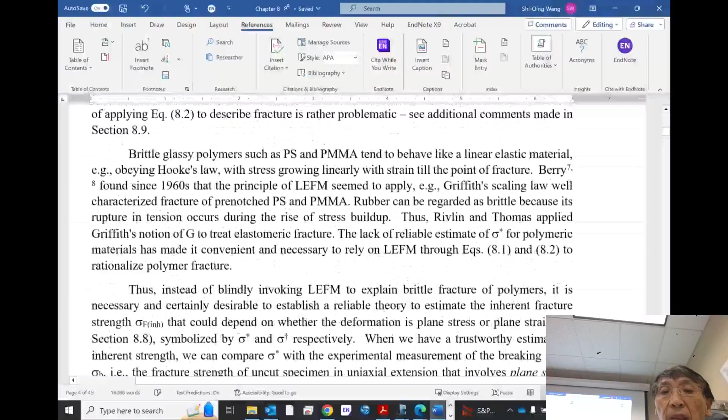So what I want to indicate is I'm not going to go through everything, but basically it's based on chapter 8 of my book. And there's an outline, meaning table of content. I will follow some part of it and skip some part of it.

Meanwhile, it just so happened that this perspective article is about to be published, which is describing a new outlook at the subject of fracture mechanics with regard to polymers. So it's very, very fresh in terms of what we need to say.

So let's get started. So this is going to be, if you like, fracture behavior of polymers. So instead of saying fracture mechanics, that's kind of scary, right? You just say fracture of polymers. And we will talk about both plastics and elastomers.

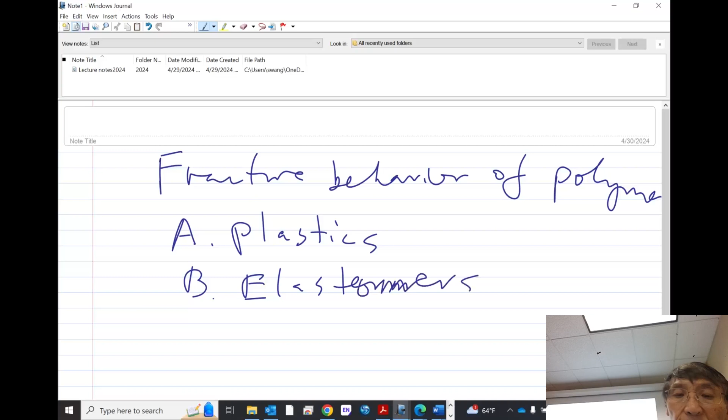So let's begin with what is fracture mechanics. It becomes a business when we worry about fracture, of course. But it really is where we need to talk about it when you are given a piece of material and you stretch it and you measure a point where it breaks. It's called sigma B. In our notation, we call this nominal strength, something you can measure.

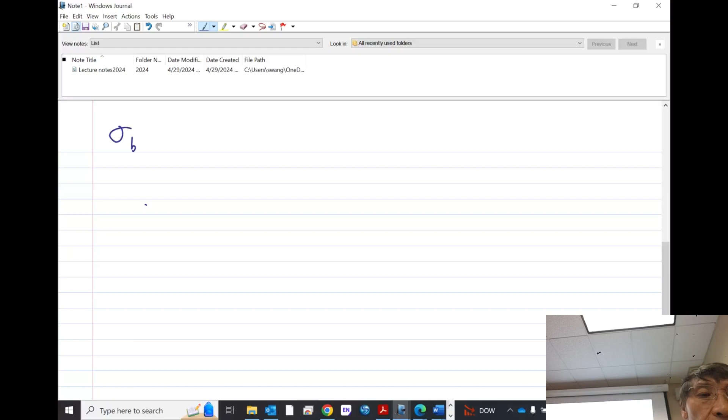And the fracture mechanics come in only if you suspect that this strength is actually much lower than the inherent fracture strength. In other words, if that's not the case, let's say if this is comparable to inherent strength, how do we know? We don't know, but let's suppose that's the case.

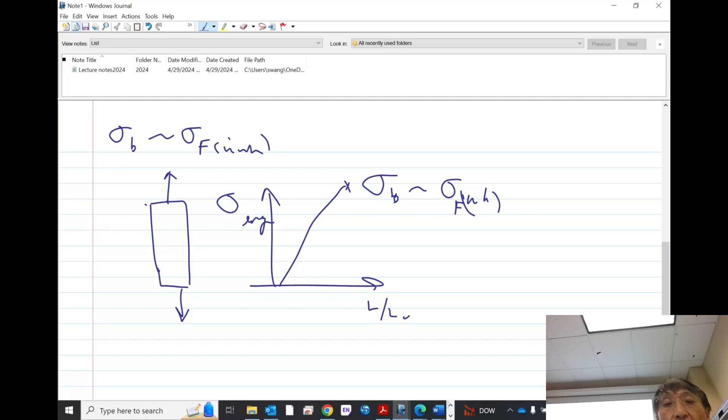If that's the case, I can convince anyone that the problem of brittle fracture, remember you are very familiar with it, if I draw stress as function of L over L0, engineering stress, it basically breaks there. And we can call that point sigma B. It turns out if you can claim that this sigma B is comparable to the inherent strength, let me for the future just call it sigma F to simplify my notation. Then you just need to report when you break it. But that's not the case for a bunch of materials, such as your window glasses.

I see the screen is never as big as that big one, so I can write many things on one page. I actually can mention that if you take rudimentary, let's call it window glasses, then it turns out this sigma B, let's say it's about 200 megapascals. And based on things I'm going to skip, but it's in chapter 8, people think this kind of atomic solids we can estimate its

strength, meaning strength in its idealized structure. And it should be about 1/10 of the Young's modulus, which you can measure. It's very hard. It turns out 1/10 of Young's modulus is already 7 gigapascal. So it's much larger than sigma B. Much larger than sigma B. And we need to come up with a way to explain why they are different by 2 orders of magnitude. This is about 0.2, and this is about 10 or 20. So it's 2 orders of magnitude.

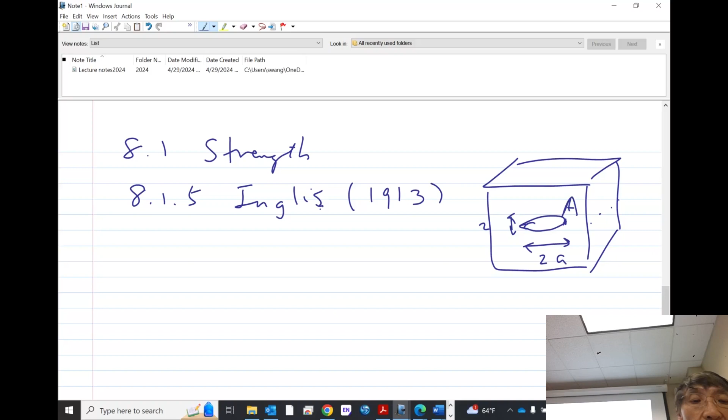It's a theoretical calculation. It considers an infinite elastic sheet, and he digs an ellipsoid-like hole. And this hole goes through the entire thickness. And it's an ellipsoid, so we have the longer dimension as 2a, smaller dimension as 2b. And he says the stress at these 2 poles, let's call it A, is stronger. So this is a sheet you are stretching like this with the stress of sigma, and it says it's stronger by 1 plus 2a divided by b.

And it turns out one way of measuring the curvature at the pole is to say it is b squared divided by a. So when you do that, it turns out this becomes sigma is still there, 1 plus, basically a over, sorry, I'm touching somewhere, a over rho. Okay, rho is the radius of curvature.

So imagine now this hole you artificially calculated is very skinny, very sharp, meaning rho goes to 0. Well, it never goes to 0. Remember, my favorite subject, it's a length. Curvature, radius of curvature is the length. To say length going to 0 is meaningless, so it's always that length compared to what? Well, however you wish to compare. Here you are comparing with A, of course. Compared to A, it's going to 0, or A over rho is infinite, which implies the stress will diverge to infinity.

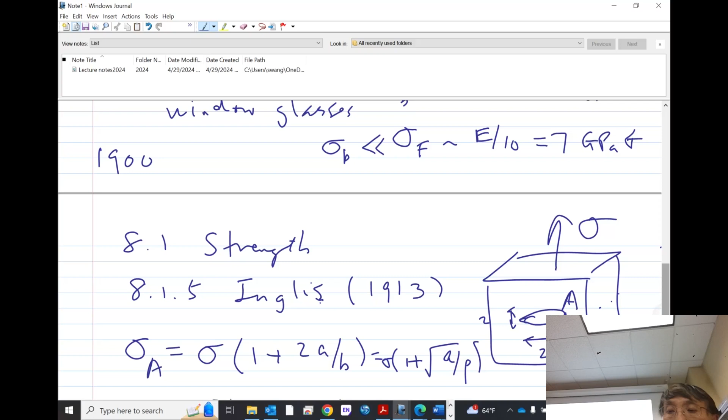So this is still very abstract, what I'm telling you. And I'm prepared to actually switch gears. The point is, this result, although very, very attractive upon further analysis, is really giving us trouble because there's no such thing as stress going to infinity. So how do I think about this? We will come back to this formula much later. Much later. For now, we are going to switch gears.

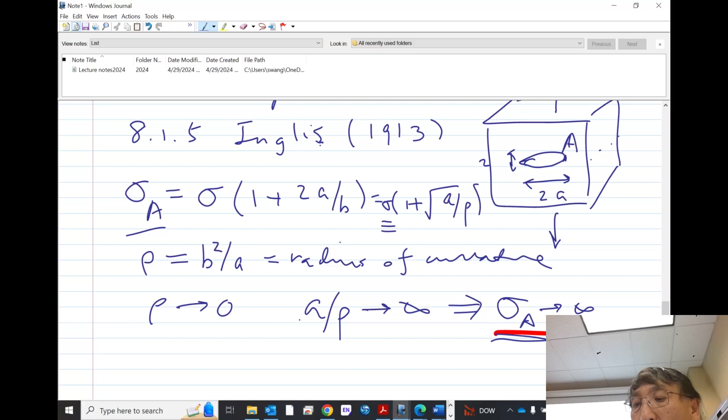In other words, we find this is quite difficult to handle, meaning what if your defect is very sharp? We certainly never observed. You see, no material will break without any stress. Okay? And this going to infinity is the same as saying no matter how small your stress is, your stress at the tip is already very large. So there's a problem.

So let me now review for you further about fracture mechanics. I just mentioned fracture mechanics is a business dealing with the effect of flaws. Actually, now you can see it is because you have flaws that your nominal stress or nominal strength can be much lower than the intrinsic strength. Now, in order for me to proceed, let me give you a general impression of fracture mechanics.

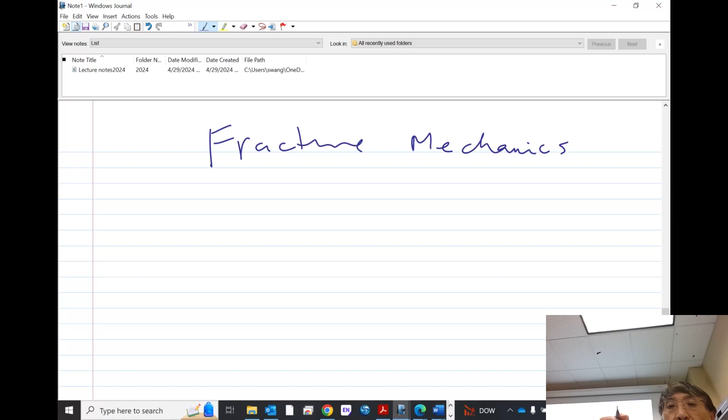In fact, for whatever we need to discuss for chapter 8, for the perspective article I wrote, mostly we're going to describe so-called linear elastic fracture mechanics. Now, this is not the first time you heard about linear. Well, linear just means input, output are linearly proportional. And elastic, of course, you know what it means. So it turns out that fracture mechanics is built on two pillars. In other words, just like us, we walk on two legs, fracture mechanics walks on two legs. There are two pillars.

What I just mentioned about Inglis, foundationally speaking, we call the Inglis solution, that's the foundation for pillar 2. And there is pillar 1, due to, my hands can still touch it, due to Griffith. I mentioned this was 1913. This is 1921. So he actually developed something rigorously based on the Inglis solution. So in that sense, the Inglis solution is a groundbreaking result.

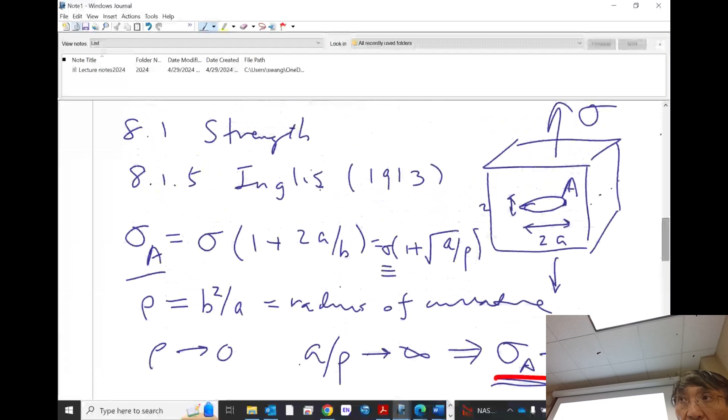So what he did is he says, let me think about this problem differently. Differently, but nevertheless inspired by the Inglis result, which says stress can concentrate. But he wants to consider this problem somewhat differently. He's going to consider, since you have a flaw, let me consider introducing a flaw. In fact, in the original problem, of course, he will just look at the Inglis result, which is a flaw like this. I draw a size, but actually this is an infinitely large elastic material. No boundaries on either side. So this is the Inglis result.

And today, of course, we say it's actually similar. So it's actually equivalent to this single edge notch. In any case, in the future, all the subsequent things, I will just do it even simpler, using this to represent that crack that has a size A, just like this Inglis thing has a size of 2A, half of that, A. It's no longer symmetric, it's semi-infinite, so it's half infinite. But it turns out the mathematics and the physics does not change.

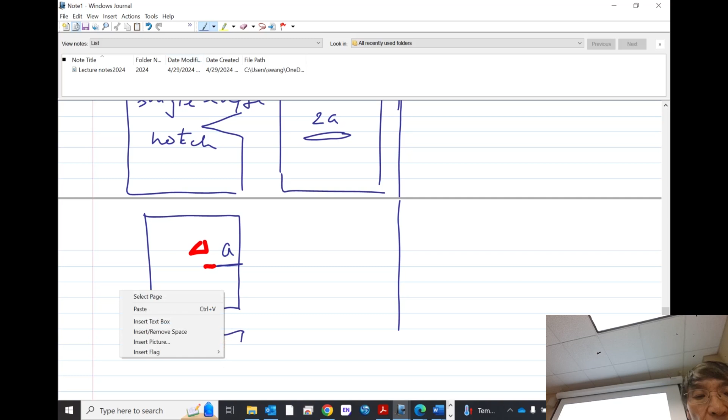You all play with soap bubbles. The soap bubble can increase its area because you did work and pumped more energy so that the bubble grows. Okay, so that's the concept. Because the bubble grows, you have more surface. So it turns out you require a certain amount of energy that's related to the surface tension and the area associated with that crack growth. That's this length delta.

I know I already said the thickness is T, so there's a T. So that's how much new area there is: delta times thickness. It's reasonable, that's the area that you have. So this is how much energy you are requesting.

On the other side, you are asking the following. You are basically stretching an elastic body with sigma. So when you do that, you store elastic energy. And you can imagine if you have a new crack of this much, you are going to lose some of the elastic energy that you stored. In the limit, when the whole crack finishes, there will be no storage of any elastic energy. So this elastic energy, if I use an estimate, I think in my book I call it EG, then I can estimate.

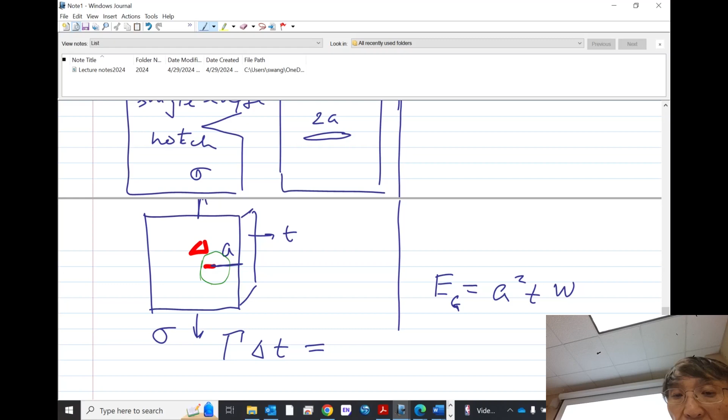The energy density W is something I probably mentioned once before. Basically, it's the area under the curve, so-called. And typically it will be of the value of sigma B. I'm going to ignore B because we're not at the point of breaking. So basically, it's sigma squared divided by modulus. So the slope is modulus. So that's how much energy density there will be. It's coming from integrating over this area. So you don't need to go into more details than this.

And the change of that, when you have a little growth of the crack, will be to differentiate with respect to a. So you have 2a coming down, and delta a, and t and W. So if you equate these two, meaning this is how much, it's negative actually, because you have a loss. So if I put a minus sign on that negative, I have a positive. So basically it's going to be gamma delta t on this side, and on the other side on the order of, I'm not going to worry about 2, a delta t W.

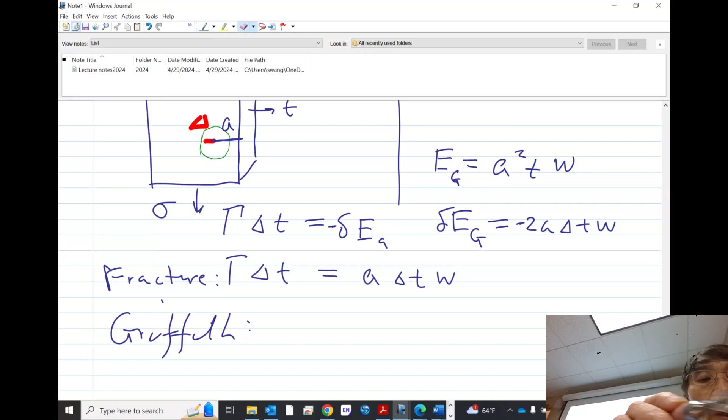I'm trying to accommodate you in terms of notations. If you recall calculus, you realize this notation needs to be very careful so you don't mislead yourself. For example, delta usually represents differentiation. So let me do it this way. This will allow me to do it right. Meaning you cannot see the bottom. It's hard for you to see. We can use a little higher now. Probably enough, right? Okay.

So if I want to get notation right, I can say the area change due to that little crack growth is delta A, which is delta times T. So what Griffith was trying to do is to ask, if I have a little crack, how much of my energy storage will be lost? And this thing is negative, such that when I put a negative in front of it, it will be positive. It will be something like 2a delta T W divided by delta T.

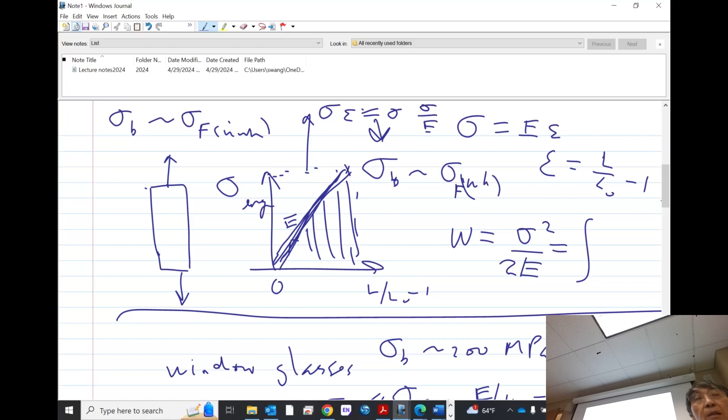That's why you have this. And then you can bring in the epsilon back here. Then you get another, right? There is a sigma, and here it's sigma divided by E. So we get sigma squared divided by E. That's the whole square, and you have half of it. Okay. So he is teaching us something. He is saying this energy release rate, if you have a bit of crack growth, I lost a bit of energy stored, and that ratio, that account, is given by the strain energy density times the size of the crack. It's just based on what I dimensionally tried to indicate.

And then the fracture criteria that I so quickly, prematurely told you, is merely saying that fracture occurs. Okay, by the way, this number, fracture energy release rate, in honor of Griffith, in the modern literature we simply call it G. Fracture occurs when G, you see, I just wrote you G, right? G is basically this quantity times a, yeah? It grows with sigma, okay? This G. Of course, if you load it more, you store more elastic energy. When you lose it, you lose more.

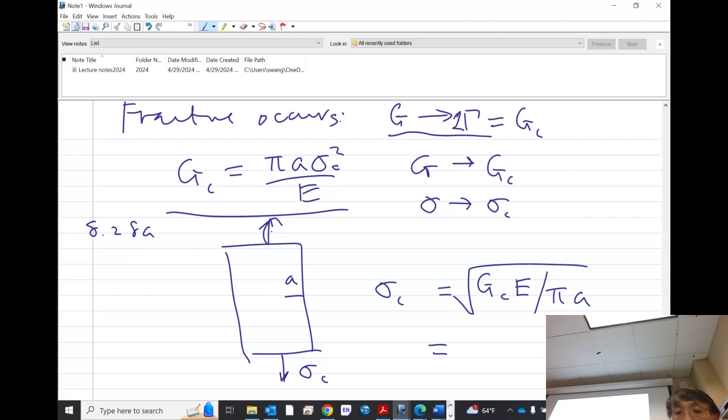This is the celebrated Griffiths scaling law, if you want to call it. I call it Griffiths scaling law. This is something I shied away from for 30-some years. It says the critical load when this fracture happens is inversely proportional to the size of the crack, proportional to the square root of the size of the crack. Okay?

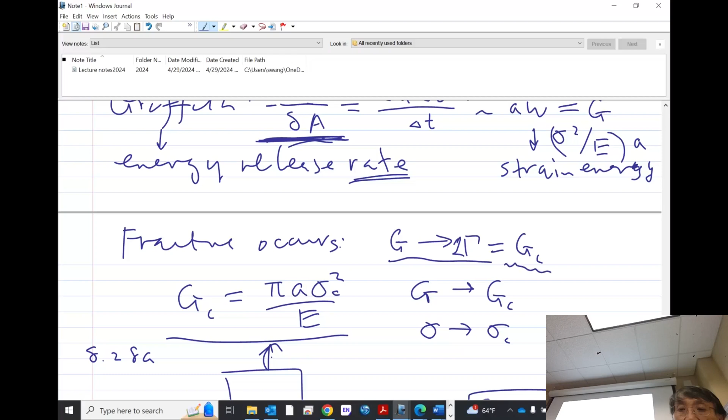Meaning my Kc, written as square root of Gc times E, is a constant. You see, if you are not careful, you notice I made a dramatic change without telling you. I have now generalized, simply called that the concept of GC exists. It is a constant. In other words, if I complete this expression, if you allow me to do that, this is the expression, write it down, yeah? Because that's my GC.

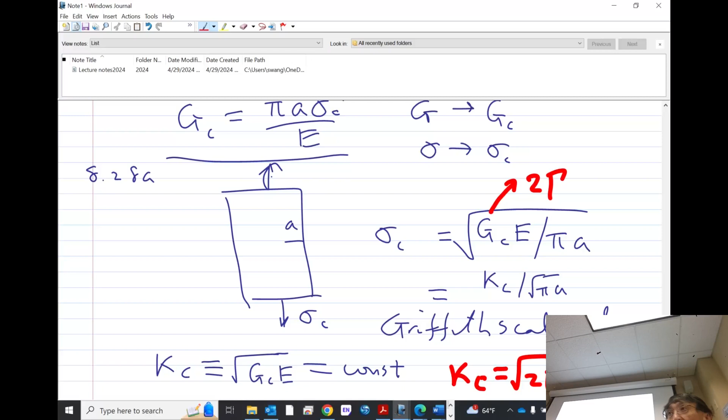So if you look at this expression, I played a trick already. If I follow Griffiths, instead of writing GC, I should write 2 gamma. Yeah? I should write 2 gamma instead. And more importantly, indeed, I can convince myself this proportionality constant Kc, in that case, is a constant because it's the surface fracture energy, the so-called surface tension, which is a material parameter, and Young's modulus, which is also a material parameter. In other words, I understand that Kc is a material constant, provided that this holds.

And this is, of course, the starting point of Griffiths. So I want you to pause for a moment and think the following. Quite amusingly, what are we saying? We are merely saying this, that the critical stress will be inversely proportional to the square root of the size of the crack. And for that to be true is the same as saying there is a proportionality constant. In other words, there exists a scenario where if you have a bigger cut, you will simply fracture at a lower stress, exactly described by this form. Okay, that's all, right?

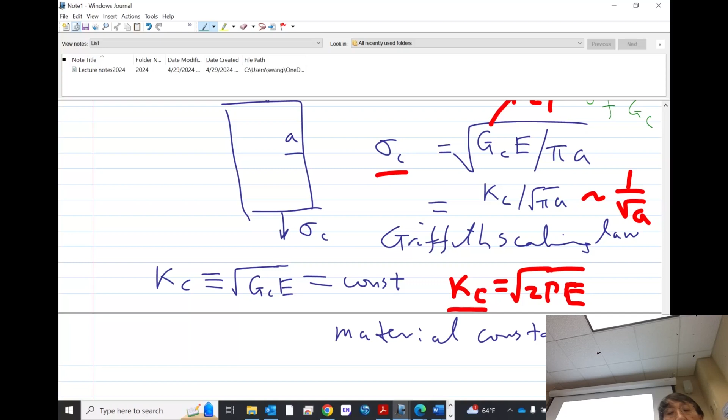Now let's fast forward our clock and go beyond window glasses. So you can have a high strength brittle steel. And of course, you can have your dear polymer. In this case, it could be your polystyrene or your PMMA. We covered this for a long time. By the way, just for your sake, the nominal strength of your PMMA or polycarbonate is on the order of 50 megapascals.

Here comes the sad news. I still vividly remember about 4 years ago, I lost sleep upon learning this from a master of fracture mechanics. During the pandemic, he offered a Zoom class from Harvard. His name is Zhigang Suo. He's very knowledgeable and very active in the area of fracture mechanics. So I was just like you guys sitting in his class, listening to a Zoom class. We knew each other previously, visited each other before. He offered the following information.

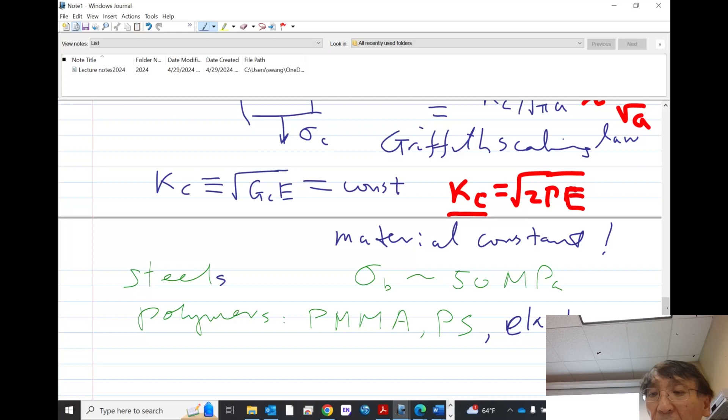different types of steels, he offered the following information. It's brittle. You can take just the brittle materials and do the same thing. You make a cut, and close your eyes, and see at what point it breaks, the sigma c. And you went through the so-called operational definition of it. You measure GC, right? According to this here.

And he says, to me, it's a nightmarish piece of information. He says this GC now is much, much larger than gamma. Let's say it can easily be 3 orders of magnitude larger. What's your reaction upon hearing this?

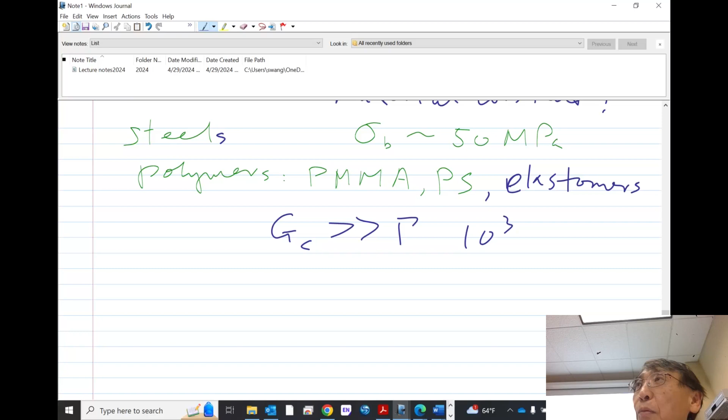Well, this is why I want to spend a minute to make sure we are on the same page. You have this polymer now, or your steel now. You operationally could still do a measurement, and you find GC. You find this law still holds. This Griffith's law still holds.

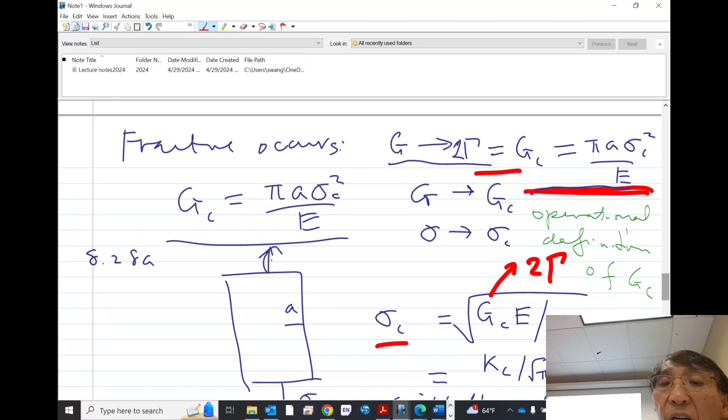In other words, Kc is still a constant. As long as I regard this as generalizing from G approaching gamma to G approaching some unknown GC. Do you follow? There simply magically in this world exists a GC, despite the fact GC is 1,000 times gamma. You get it?

I was in my comfort zone. When GC is gamma, I understand why GC is a constant, because gamma should be a material constant, independent of the crack size. Okay? But why on Earth is GC still constant when it's much larger than gamma? I scratched my head. I did not have an answer.

The world moved on because the phenomenon, let me write that down. It's my favorite word. The phenomenology is so convincing and powerful. What do I mean by that? I mean, there exists a GC, despite the fact it's much larger than gamma. You see.

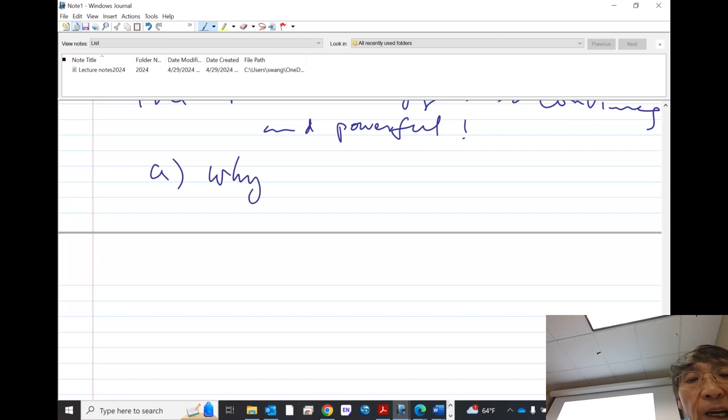Today, I know the answer, so I can formulate the question without giving you the answer. The question is best formulated, most concisely, if it's a pertinent question, and if it is a question that already has an answer. So the question is, of course, why is GC constant? In other words, independent of cut size. In other words, constant in the sense it's a material parameter. Why?

Since it's not related to surface tension anymore, the general view is, because this is true, in addition to creating the surface, you must have lots of energy dissipation. Well, I prefer to, at least without violating anything, simply say lots of energy got released, that's for sure. I'm not sure I want to call this energy dissipation, because that has a very different meaning. It means that energy was consumed. Whereas here, according to Griffith, it's about energy being released.

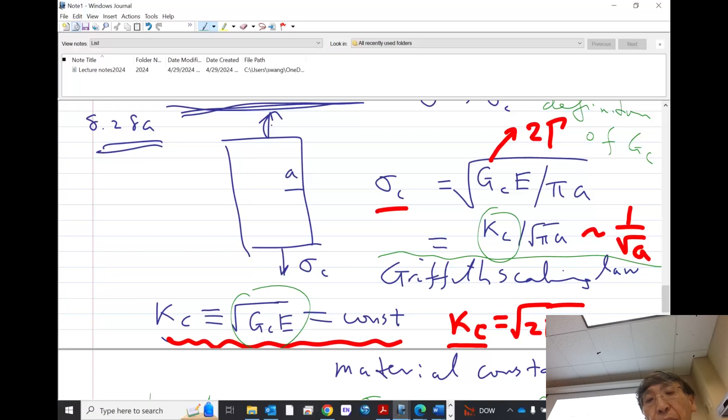And I think you guys got it. I really appreciate this. You got it. How I lost sleep. It does not tell me. And magically it works, but it doesn't tell me. Can you believe it? How amazing this problem is? How simple this problem is? It's amazing. Okay. Having said that, let me tell you how much you need to give credit to fracture mechanics.

Because they discovered for this brittle, usually linear elastic, so it turns out our polystyrene, our PMMA, our brittle styrene, and highly cross-linked rubbers can all be very nicely described by this level of fracture mechanics. That the GC is constant. You can change your cross-link density, it's still constant. You can do a bunch of variables, swell it, it's still a constant. It may be a different constant, it's a constant, nevertheless.

So not only I want to re-emphasize what a triumph, what an accomplishment this was, that G was found to be constant. But actually tell you something I did mention in the perspective article, which is this. This is a bit profound, actually. So watch what I do here. I'm going back to the beginning

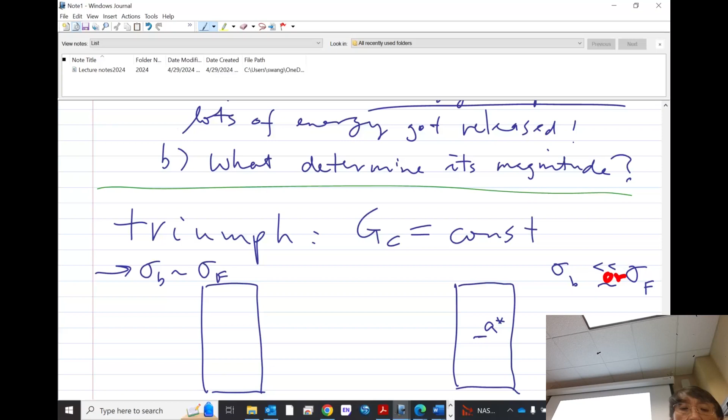What a flaw does is it gives you an inhomogeneous situation where a flaw is where you have stress concentration. What happens is when you don't have issues with flaws, we call it flaw tolerant. I know, it's just my pen, it's just sometimes very slippery. Flaw tolerant. In this case, when it's flaw tolerant, be my guest. Your nominal strength, sigma b, is all you need to characterize your material. Okay?

When you have a flaw intolerant material, such as your window glasses, then a seemingly, why is it seemingly? We call it uncut. A seemingly crackless sample, because it has indeed a flaw that weakens your material, you can no longer use nominal strength to describe your fracture behavior. Both are doing fracture. Both are doing brittle fracture. What I mean by this, let me amplify this in a big time.

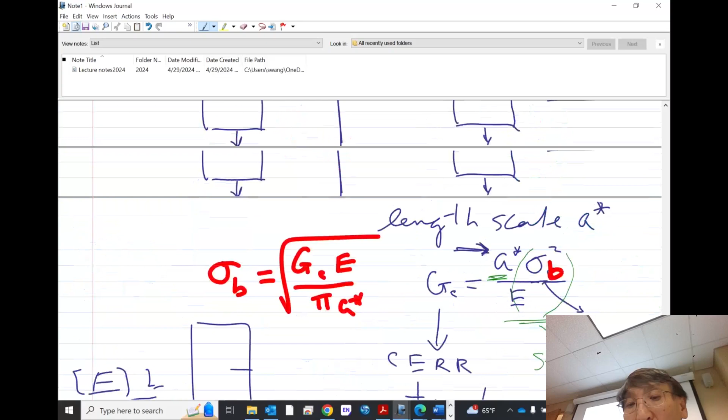Remember this part because we'll come back big time on this, when we try to answer these two questions of why it's constant and what determines its magnitude. Any questions?

So, yeah. You can see where is the polymer, right? Of course, where is the polymer in this problem so far? Or where do we cut in? What contributions can we make? I think that's kind of amusing. Asking these two questions has everything to do with polymer physics. Is that fair? That has nothing to do with fracture mechanics.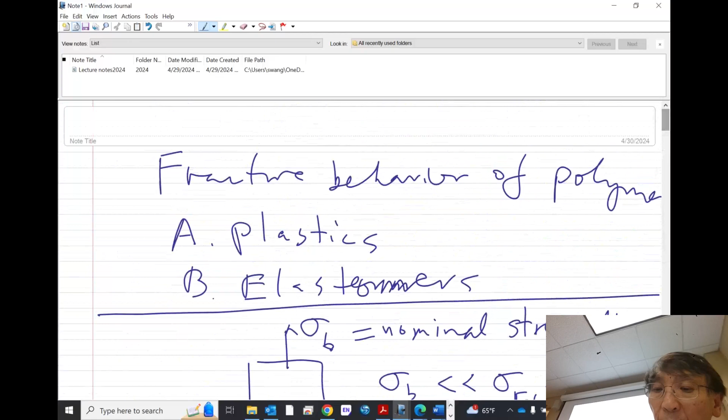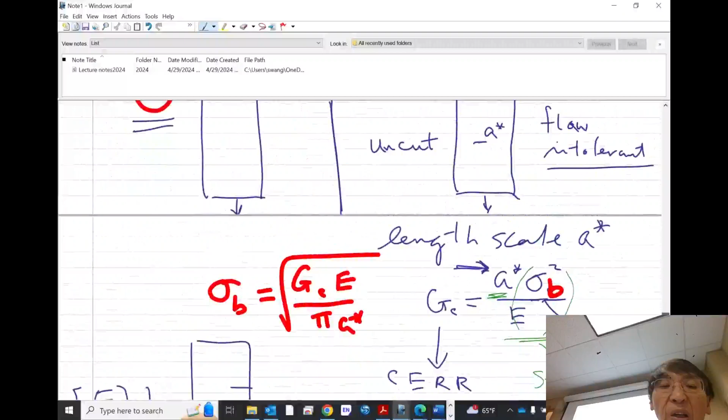If you are eager to know what our role of polymer physics is, then I can quickly bring you back to that point where you realize you are the master of this subject. It is right here. Or where do I put it? You can put it anywhere, because I actually mentioned it many times. I mentioned it here last time. As I said, the story of fracture mechanics is a story of this being true.

Because when this is true, there are no flaws in the system. And therefore, there isn't a length scale that I need to consider. So I just have that stress. So how come this is true? Or the question is, is this true for our polymers? In fact, that part I think we covered, we mentioned a couple of times, but we'll come back to it again.

This question of whether this is true, I really hope I'm not confusing you. Let me bring you back to where it needs to be. These two questions themselves have nothing to do with fracture mechanics. Sorry, did I say has nothing to do with polymer physics? I'm sorry. Verbal typos, right?

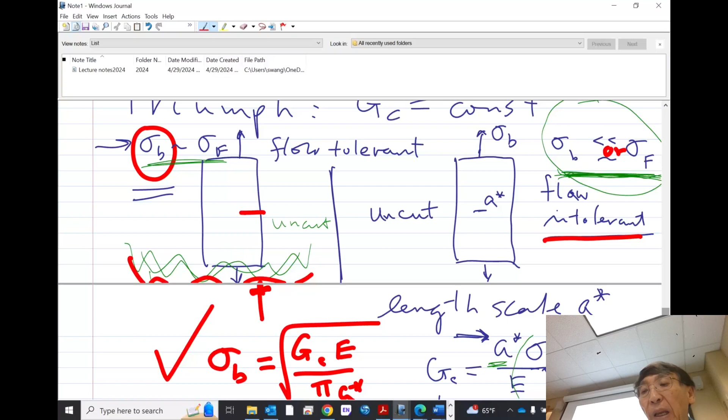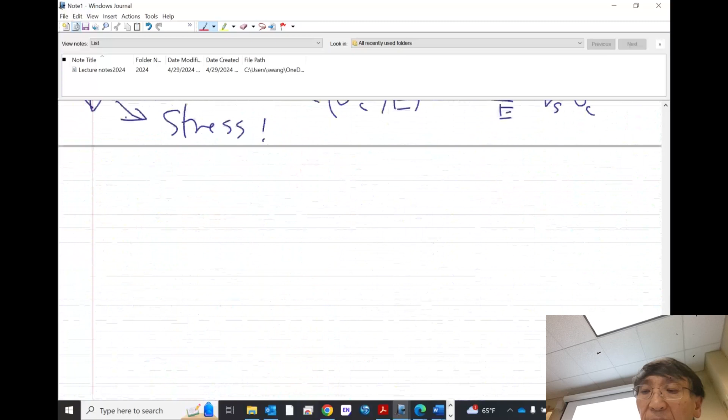So I think I mixed all kinds of information, including some that you have yet to appreciate. But that's the story. You have a brittle polymer. We previously thought it was exhibiting a lower strength than what it should be. We blamed the flaws, although we don't specify what the size of the flaws would be, and we proceeded. So that's why we're trapped into the same game of fracture mechanics that everyone dealing with brittle fracture of materials deals with. So I verbalized everything. I know it's being recorded, so at least we're not going to lose it.

But basically, there is the question of where polymer physics comes in, and as I keep coming back to this, the physics comes in when we need to determine what the strength is in the absence of flaws. Okay, and I further indicated that even in a flaw-tolerant material, if you introduce a big cut, then it obeys the Inglis result, the Griffith result. That big cut will weaken your material.

So when we say we have a flaw-tolerant material, what we mean is that in your material, the flaws are so small that they do not reduce your strength. Meaning, we can regard it as not having any flaw. And it will take some experimental data for you to further appreciate that statement. But I hope you understand that this ought not to be confused. Just because you don't need fracture mechanics doesn't mean you cannot create a case where you need fracture mechanics, which is to have a big cut.

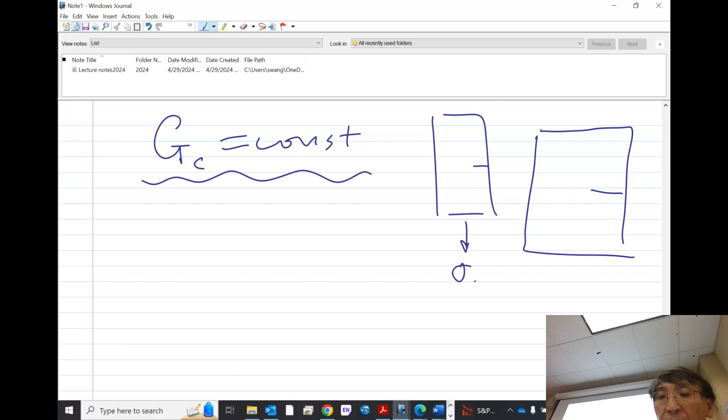So obviously, you can have a cut size this big. You can have a cut size this big. Of course, you have sigma C1 here, and you have sigma 2 here, sigma C2 here. And obviously, sigma C2 will be lower than sigma C1. Things like that, right? It scales as.

So, okay, that's it. We'll take a break soon, but let me set the stage on the next point. So now we're going to do a little bit of polymers. It's not like we don't do it. So far, I went through 8.1.5, that's the Inglis result. And then we went through 8.2 on pillar 1, and mostly discussed the Griffiths story. So it's 8.2.1. And now we're going to jump a little bit and talk about polymers. This is still under pillar 1 and section 3.

And this is a famous story, and it has everything to do with Akron, has everything to do with polymer. Why I say it has everything to do with Akron is because Akron is famous for doing rubber research, and Thomas is a good friend of Alan Gent, our deceased outstanding faculty member who worked on rubber, including rubber fracture.

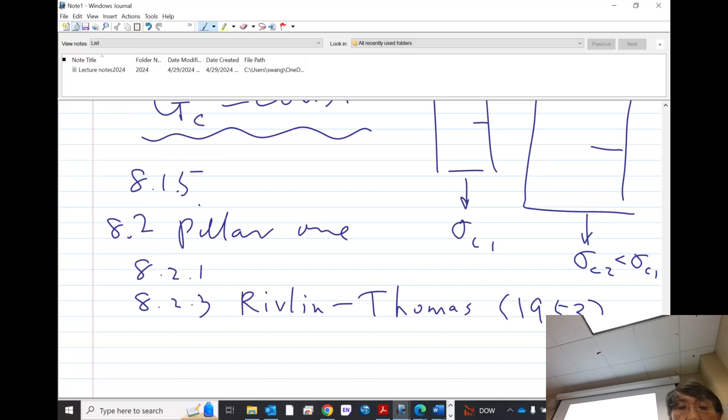This is supposedly the first study of fracture behavior of polymer. In this particular case, it turns out it's not a polymer. It turns out it's simply vulcanized rubber, actually. And they did something. It's a remarkable paper. I could even upload it. It's a remarkable paper that got many problems. Meaning, when I say got many problems, we had a fresh, new appreciation and look at it.

They introduced a protocol that for the next 70 years, 71 years now, people use it to describe rubber. And it's really ingenious, the protocol. However, on the other hand, it was motivated by Griffiths' energy release rate, which is an angle of looking at the problem that has given us difficulties in terms of what I just said: why this is so big and why it is constant, right? These are the two questions, remember. We had these questions because we are in this way of describing it, which is energy release rate. So the rest, I want to do it so that you really see a modern view of this 70-year-old problem.

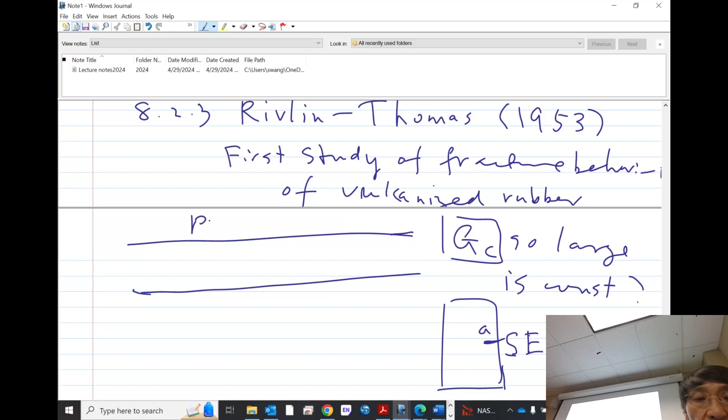What you can imagine, however, is when you have such a setup, very, very short, very, very wide, in theory, it can be as wide as you wish. Then when you draw this way, still always, we will define drawing always vertically. When you draw, you can verify it. We have done an experiment ourselves.

For example, you can put some markers on your sample, right? You can make markers on your sample. And you draw. You find, as you draw, the spacing between them do not change. Meaning the width doesn't change. Remember, this is rubber, so the volume is conserved. So all the length change translates to thickness shrinking. Yeah? Get it? No width change. Width does not contract. When you draw, the thickness changes, proportional to how much length you have. Okay, that's one thing.

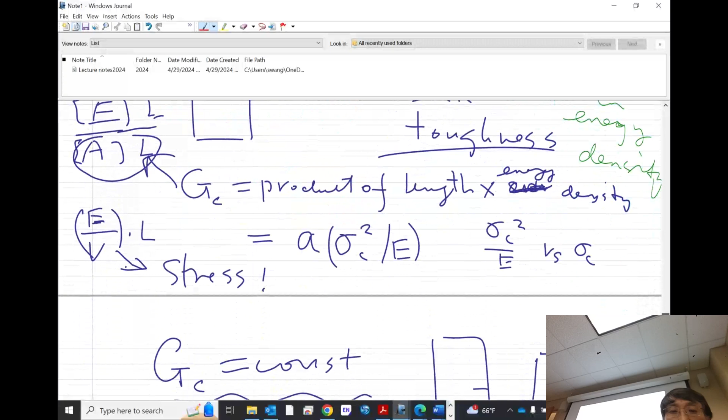Based on this analysis, this clue occurred several times. Based on here, for example, we did it many times. G is a length times energy density. And it's happening everywhere else. You can imagine what he derived or showed the G in this scenario to be, G or GC. It's basically WC times H0. Again, it's the dimension of stress times length. This energy density has the unit of stress, and this is constant.

So we will take a break and leave the subject actually, except to tell you, if this is constant, it means energy density is 1 over H0. Or let me say this much before we take a break. Since this product is a constant, imagine when I use a much bigger L0, H0. What does that mean? The width is even bigger, so I keep the aspect ratio the same. Suppose somebody chooses a much bigger sample, he can afford it, he has a machine. Somebody chooses a much thinner, much shorter one, which means I'm changing H0. Since the product is constant, it says when it is much taller, the energy density only needs to be much smaller. That makes sense because you have a bigger volume now, because volume is proportional to H.

I know you may not have realized this is the way it's going to go, but here comes more of the polymers. So, just like that problem of different cut. Let's try to reopen it. I think there was an issue of asking me to save. Yeah, okay. Future behavioral polymer. That's a typo.

Rewrite. Okay, so we are going to do a little bit more of a polymer physics side. Before that, I emphasize that with single edge cut, we have Griffiths, something like this. With the pure shear, merely we can simply say that perhaps you can say that the WC is given by GC divided by H0. I have not thought deeper on this. But basically, for different H's, you get different WCs.

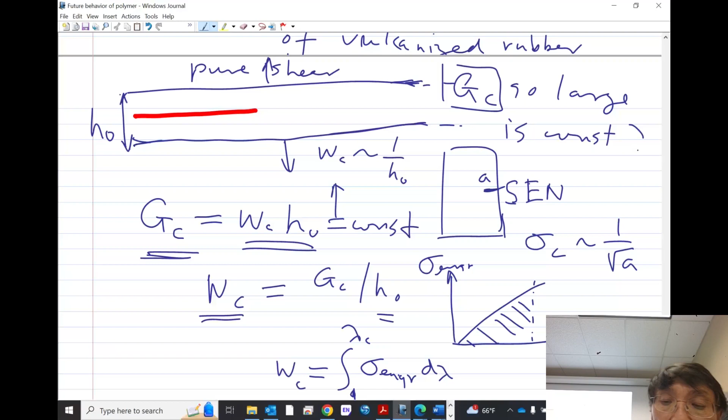WC, I didn't emphasize. If you want to know that detail, it's important. So what happens is you take an uncut sample, you get a stress strain curve. It's always engineering stress, and this side is lambda. So that the W is always just the integration of sigma, engineering stress, d lambda, from 1 to lambda C. Pictorially this is just this area. And this boundary of lambda C is defined as the critical stretch at fracture.

It's always confusing if you don't know it. At fracture of the pre-notched sample. So let me explain. Basically, you have an unnotched sample without this red line. You measure this curve, and then you have the cut. You draw it until a critical lambda, which is nothing but L over L0.

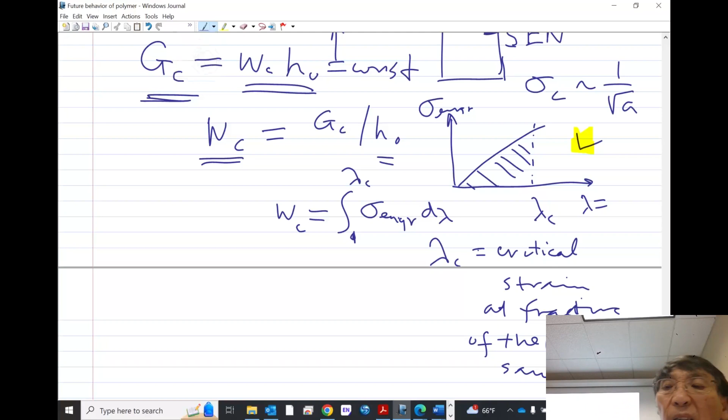Apologize, H over H0, because we use that notation here. So it's the height. The height originally was H0, and this is H. So you draw. At some point, this notched sample breaks, and you call that lambda C. You record that lambda C. And then you go to the uncut and find lambda C, and then you integrate this area. And that's your WC.

It turns out this operation involves a rather deep and very clever argument. Basically, these two folks advanced the following idea, very clever. He says, if the crack advanced this much, okay? Let me refer to it. Advanced, right? From the beginning to here. So you advance this much. I'm trying to draw a distance. If you advance this much,

it is equivalent to somewhere in the interior of the same amount, that part of energy is lost. Very clever argument. The argument was whatever happens at the tip is complicated. Whatever happens at the boundary could also be complicated. But it doesn't matter. If you advance a delta amount here, it amounts to, in the middle of the uncut, this much of stored energy no longer being there. Right? Of course. And how do I calculate that energy? That part of energy is just like that of an uncut. So that's that. Very clever. So everyone uses it.

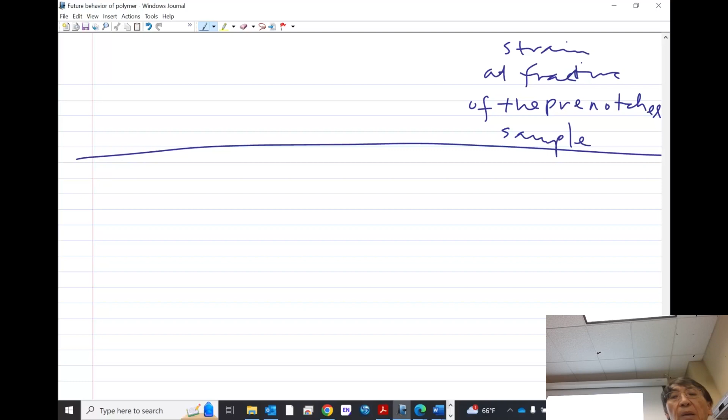So in any case, let's proceed and say a couple words about what we know so well about polymer physics before we move on. And that is the next topic, very famous in the literature, called Lake Thomas. The same Thomas. Lake is another person. They're all friends of Professor Alan Gent. I will not say too much about anything other than to follow the idea that GC is something important to compute.

So people started to realize that maybe at a crack, I can just compute for, right? It's a sample that has a certain thickness. Maybe I can just compute what the energy release is. Follow exactly the definition of it, right? If you propagate this much, let's say you propagate this much, then the strands here must all be breaking. And let me just calculate it, okay? Go ahead and calculate it.

And the thing that's being loudly advertised, remember, at that time, there was already, I think, a disturbance that Thomas, 1953, designed this new pure shear method to describe rubber. They already found this is disturbing, much larger than surface energy. Okay? So if there's any way I can theorize it, bring me closer to that, it would be great. So this is deeply advertised. So in this, it's a network, so it's nothing really new to you guys. Indeed, the argument was this,

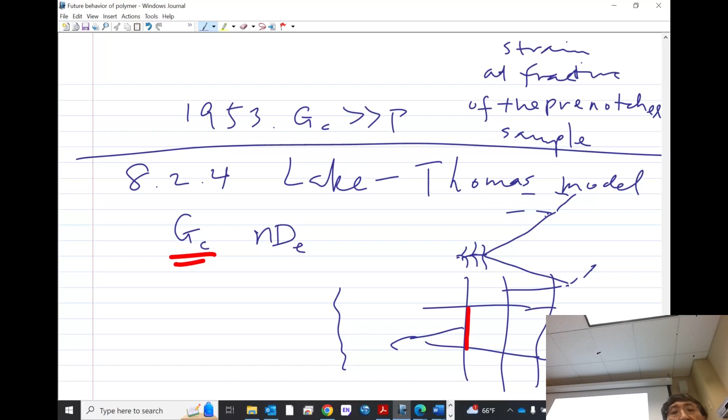All right? Moreover, he thinks if the energy to break one bond is this, one bond, then I realize in this chain there are many bonds. So I need to multiply that. In other words, although only one bond breaks, each bond stored the same amount of energy, close to that of breaking energy. It's just purely following the energy release idea. The rest is that energy times how many there are per unit area. For psi, cross, I call it x, indicating cross.

Each bond will store energy of the so-called bond dissociation energy. In fact, this is the familiar symbol we used before. Each bond does that. And a strand of n such bonds will result in an energy release of n times d. And remember, this is energy per unit area.

And therefore, it is the number of strands. Each strand consumes nd amount of energy, and area is A, so capital N over A is nothing but the so-called area density that we are familiar with. This area density, which we went through many times, is simply 1 over the packing length times the size of the strand.

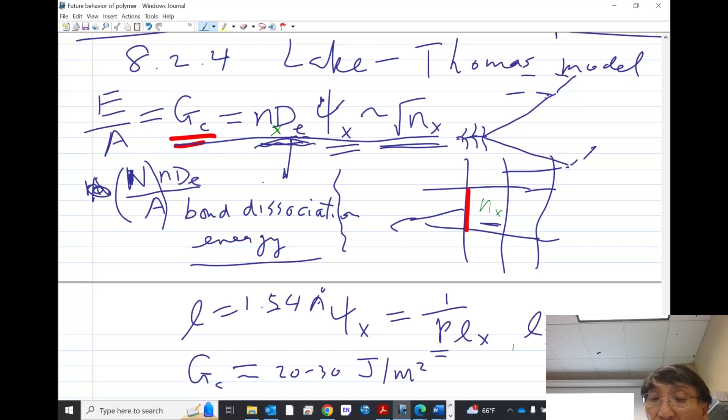And in contrast, I just want to show you. Sometimes nowadays, for reasons that are clear immediately, one likes to call this G0 instead of GC, because it's really the lower bound. Experimentally, GC could easily be more than 10 kilojoules per square meter. Three orders of magnitude higher.

So this Lake Thomas model, you can see, didn't help us. You have to again interview them, right? They made a model in order to explain that this GC is much larger than gamma, or much larger than whatever. But basically, we find a number that's still very, very small.

Since you guys all went through this bond dissociation story, the energy used in this argument assumes the bond breaks instantly, meaning you exerted the maximum tension on the chain. And that would occur on the scale of tenths of a picosecond, 10 to the minus 13 seconds. And of course, our breaking of rubbers never finishes that fast. It usually occurs on much longer time scales. But that's really not important for this problem. The problem right now is that this idealized calculation of GC is still too small compared to experiment.

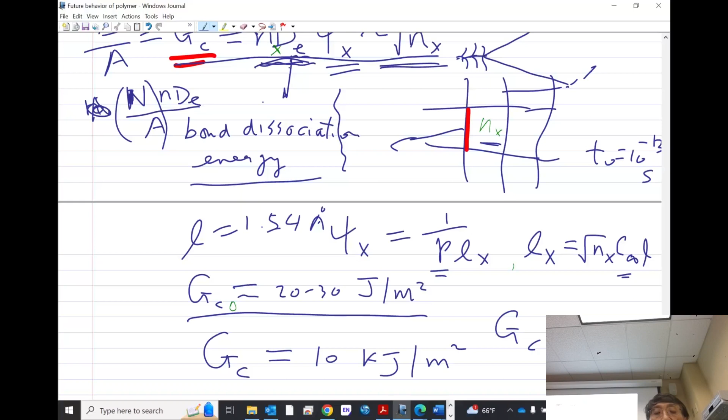That's a pretty sad story. And in the modern literature, people start to suggest that this calculated GC, which people call G0, is simply the lower bound of GC. I'm kind of in a hurry to tell you this part. I don't know when we will come back to talk about it, but it turns out in the literature to be very important. Very sadly, for elastomers, such as our dear rubbers that Goodyear uses in their tires, GC is not a constant at all.

I just said so far, you heard the whole thing, that this is a material constant. We even have a question why it is a constant. Not only do we worry about magnitude, we worry about why it's a constant. But sadly, for plastics, for your polystyrene, PMMA, it's roughly a constant. When I say constant, I mean this: it doesn't depend very much on how fast you are stretching until it breaks. Well, for your glassy polymers, it's only a few percent when it breaks. But rubber, as you know, can stretch 100%, 200%, 300%, whatever, right?

So for our elastomer, sad story comes - what is the other paper? 1955, I think, is their third paper, that this GC is not a constant at all. A typical way of writing it is something like this.

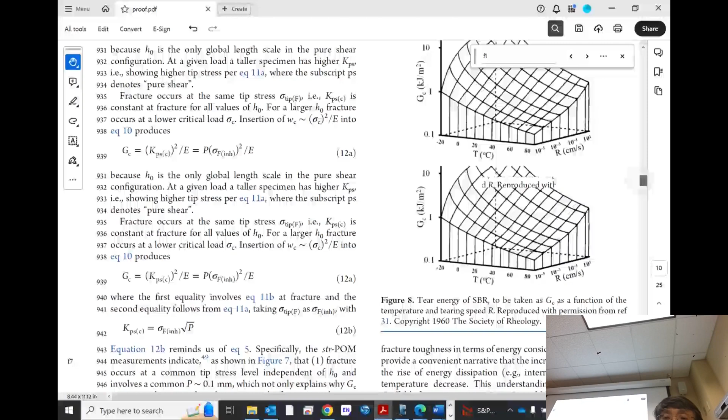This is known since the 1950s, soon after the first paper in '53. In the 60s, it started to become very well established. In fact, since I have this file here, let me show you that result, which I cited in this perspective article. Okay, so this is the plot.

1960, for example. So what's plotted is GC, done in two ways. I showed you only one, the pure shear, and it turns out it's very convenient. I'll go back and forth - I would always have a hard time drawing it. So if this is the piece you have of your rubber, it turns out you can always take this trouser shape and tear it, usually supported by a substrate so that it doesn't involve much deformation.

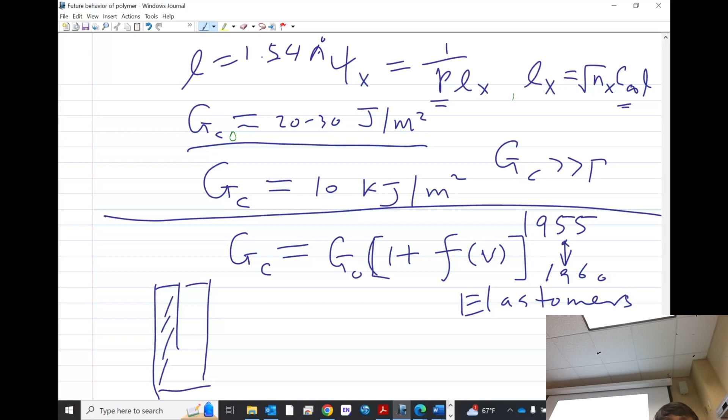So basically, along this line, you can tear it. And you will find you need enough force in order to tear, and T is thickness. If you examine it, you find this has the right dimension, force per unit length. So you can tear - in general, you can either tear or use pure shear. They give similar results. So in the literature, it's often called tear, called tear energy. It's the same thing.

Basically, toughness. This toughness is plotted in this three-dimensional plot, so-called - I call it - in terms of, you see, this one is really tear. You see, they use R. The R is centimeter per second. So it's really tear, okay? It's not that pure shear thing, which you can do too - it's the same translation, but this one was really tear.

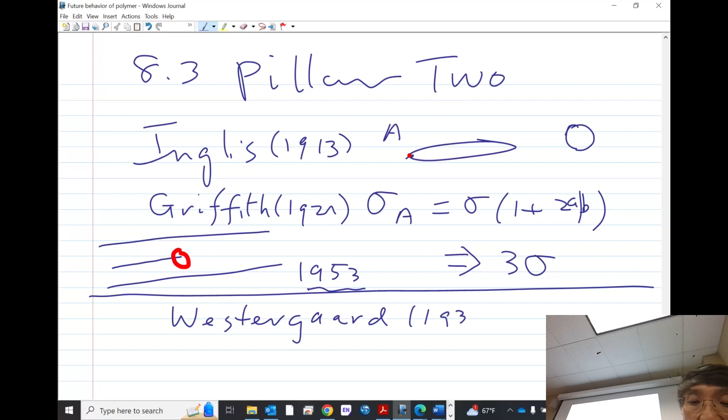By the time Rivlin and Thomas did the problem, 1953, it was already known roughly what's happening at the tip beyond Inglis. But this paper says, I'm not going to bother finding out what happened at the tip. It's too hard, because what's happening at the tip may be too small to resolve. So it's explicitly in the paper. Okay? So it's an interesting side remark I made. The point I want to make is there is a very celebrated piece of result, 1939, if I'm not mistaken. Surprisingly, I didn't indicate the year on the writing.

Basically, 39 or 37. Basically, he had a further description of that to help us appreciate the problem of a crack. So if I call that tip the origin, then this point is R away from that crack tip origin. Now if I ask what is the stress here, they found, in the limit of a line crack, in other words, the crack is very sharp, meaning, in the mathematics, it's just one line that divides top and bottom and ends at this point here, the green point.

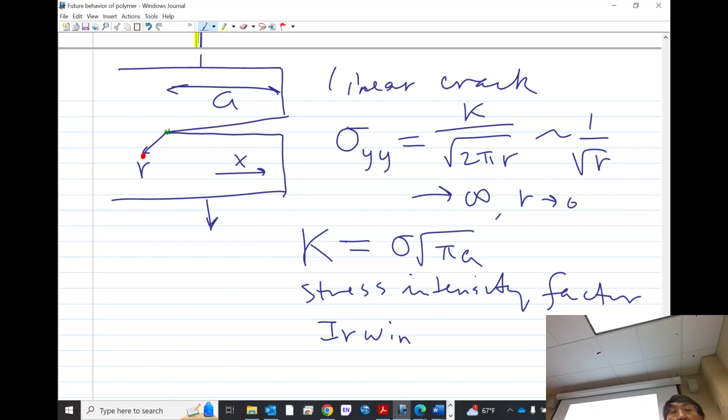So K often is also regarded as a loading parameter, because in linear elastic fracture mechanics, K is simply related to G in this way. I'm trying to figure out which dimension it is. Stress. Basically, I have it here. So yeah, it's G times, that's what I thought, G times the square of... G is the energy release rate.

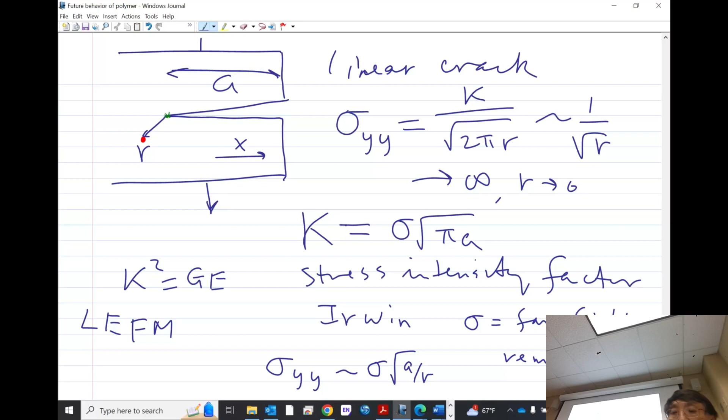And what can happen at R equals 0? Well, according to this mathematical result, that stress will be infinite. Well, how can any material you have withstand an infinite amount of stress? Of course not, right? Meaning your material will break down somehow before you approach the maximum.

So here's what you tend to draw if you think about your stress as a function of R. You will have basically a divergence. I know I didn't draw the knot right. So if this is 0, then you really have a sense of this thing diverging to infinity. Right? Goes to infinity. But of course, no material goes to infinity.

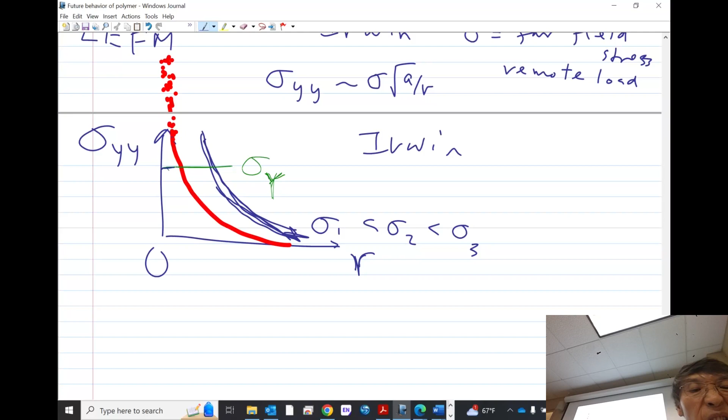In particular, Irwin simply called that you cannot approach further to the tip. You have a region that's limited by the stress. Its stress can only build up this much. And this region, he called the plastic zone. So this zone for sigma 1 is this, for sigma 2 is longer or larger.

Why I say that is simply because, you see, all this thing becomes the prefactor, right? Sigma times square root of A is this prefactor, and the rest is the 1 over square root of R behavior. And this prefactor, of course, for larger sigma is larger, so it pushes the red to the blue line. And the blue line, if I may, the next one is the green line. So that will be the green, the blue, the red, right? So it's like that. That's what the prefactor does, right? It pushes this up, right? That's this. So this I do faithfully because I don't want to miss anything for you.

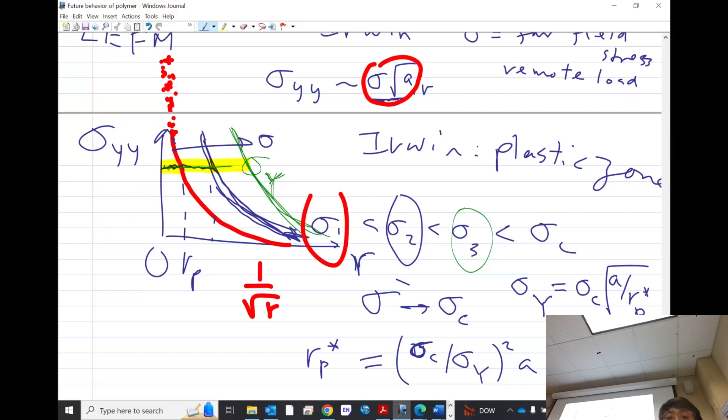We're stuck. Don't know what to do. The textbook presents this. I was given this.

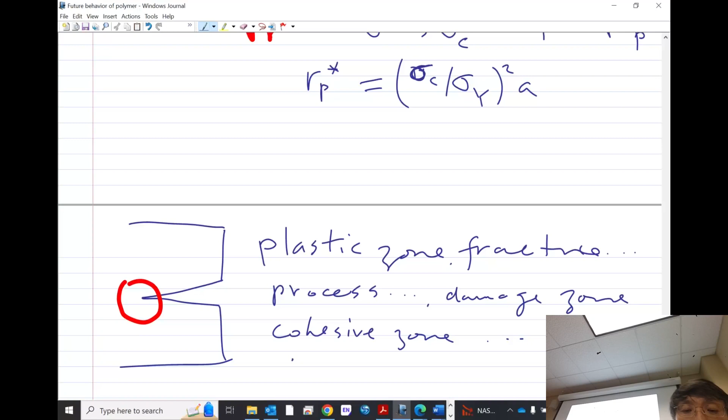And today, in our work, we found a zone which I will describe in detail next time, stress saturation zone. It's just another name, as if, but there is some substance associated with that. And also, in spirit, the result is different. So maybe I should show you that to drive home the point. So let me go back to this perspective article in that sense.

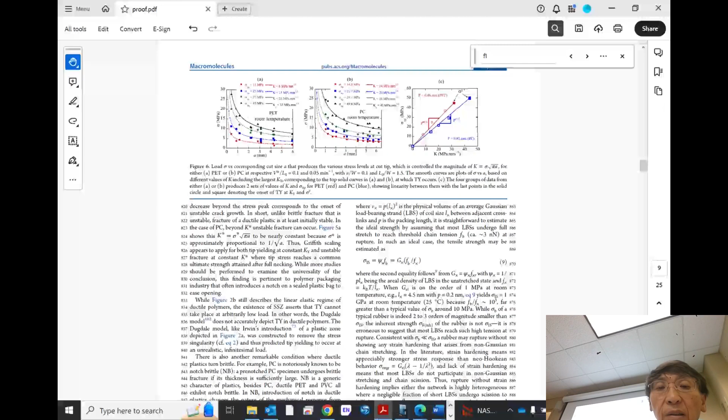Oops, the CPU is so slow. There's nothing better than carefully drawing the figures. So here's this result. Here's this description. I think we should try to observe that, and then we're almost free to go today. On the left is what I just told you.

Some kind of reaching some level, the material goes nuts, meaning we don't know what can happen there, but it certainly cannot accommodate stress diverging to infinity. We keep increasing stress, blue becomes green, green becomes red, almost the opposite of the three colors I mixed up. But eventually, boom, reach a sigma C, some magic sigma C, magic because we don't know what it is. And the zone grows to a particular size. We call it R_P. P stands for plastic. Sigma star is that critical point. And then things go fracture.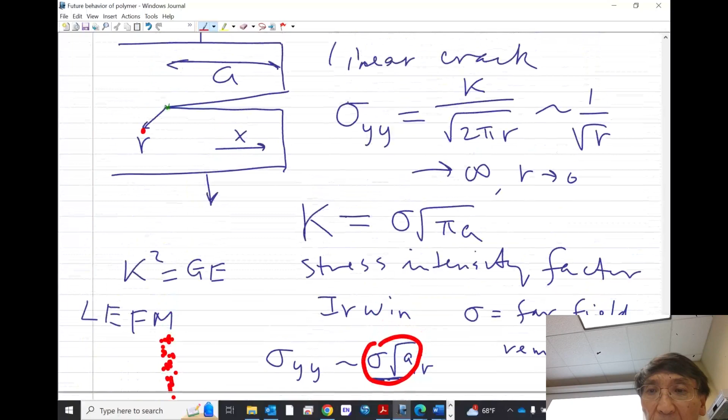So what's going on? In other words, when I say what's going on, I mean, well, in fact, I don't need to give you the whole 9 yards, but I can give you 1 yard. The problem, as is often the case in science, certainly in the polymer physics I know, is very often created by the disconnect between theory and experiment.

I'm almost inclined to say that it's so easy for theory to mislead a field. This is not a blame, because it's a very general statement. Here, this Westergaard solution created such a difficulty for us, right? Remember, the remedy is Irwin's remedy of proposing plastic zone, because there's no other way out.

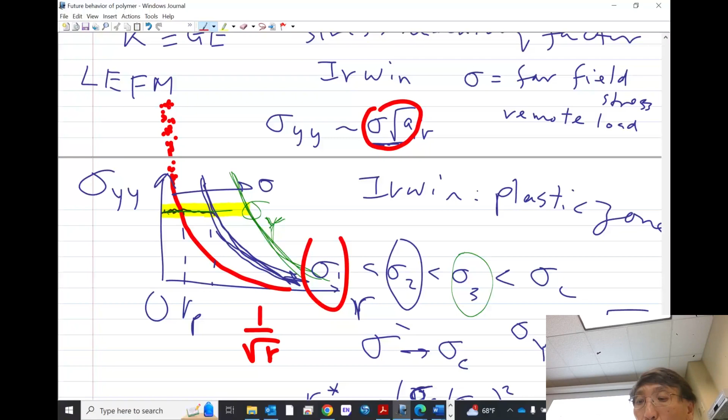What is the reality? Or more simply, to what degree does this result hold? You can rephrase the question. It's a mathematical, beautiful result. It's absolutely a cornerstone, in my opinion, in fracture mechanics, because it delivers the essence of how stress builds up toward the tip correctly for a linear elastic material.

But the question to ask is a trivial one. Your dear polymer, or your dear any system, well, I'm going to touch on the question of window glasses. How feasible is it to imagine the existence of a crack so sharp it's mathematically zero in thickness, or infinite in sharpness? How plausible is it for a realistic linear elastic material to have such a sharp crack forming at the tip? Let me rephrase it, and you can apply your insight now.

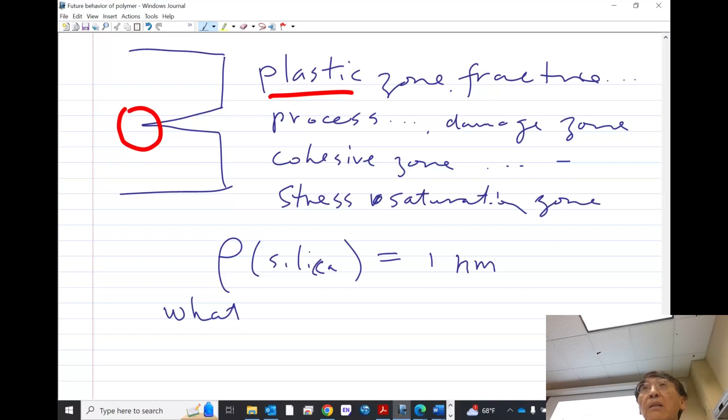Well, the real question, just like the one you heard about GC, is what determines the magnitude of rho? What determines the magnitude? Fair question. May I venture to say the structure, or whatever you call microstructure. Remember, these are just covalent bonds, and we think of it as a gigantic network, an inorganic polymer, three-dimensional. And this occurs, of course, on nanometer or angstrom scales.

So the question that we have no answer to even today is this: if you translate that same question to a piece of polystyrene, I can put a blade and hammer on it, and it will start to crack. And if I don't finish, there will be a crack embedded into the intact part. What is the sharpness of that? Well, you may say, oh, it still depends on the structure of your material. What structure do we have? We have a kind of network that can pull out whatever. And then go to rubber, same thing. What is the sharpness of this tip?

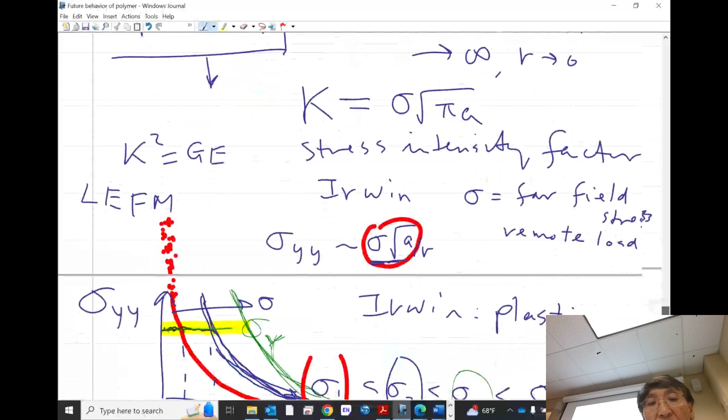Wow. You have to appreciate the totality here. We have Griffith that influenced the suggestion of pure shear. Everything is an energy argument. And I even mentioned that Rivlin and Thomas simply says the tip is too small for me to resolve. So people just gave up on exploring a relationship between what happens at the tip versus toughness.

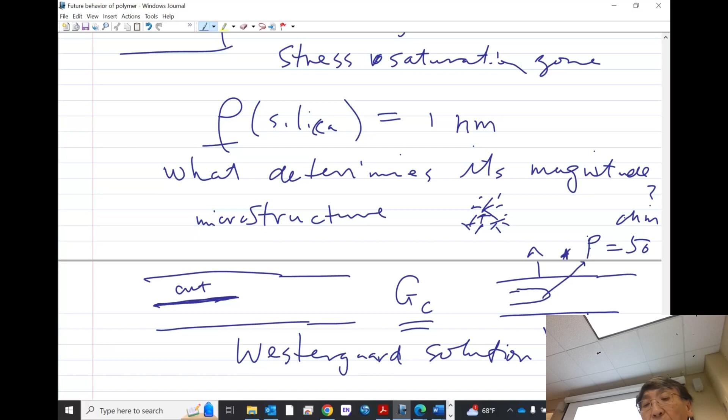In other words, the real question really is how far or how much more can we push the pillar two approach? That's the real question. Let me rephrase it. People fall in love with pillar one for 2 reasons. One is it involves energy. It's often easier to model or understand than stress. Number 2, it's so-called a global approach. It does not care what happened at the tip. It has that operational definition. It just measures GC. Who cares what's happening at the tip? Although whatever happened at the tip is reflected in this operational measurement of GC.

So handy and convenient. If you pursue pillar 1, no need to look back at pillar 2. That has this difficulty that I just illustrated to you. Although, on the other hand, you have the opportunity to push this pillar 2 much further by looking at what happened at the tip. Don't assume that nothing can be seen at the tip.

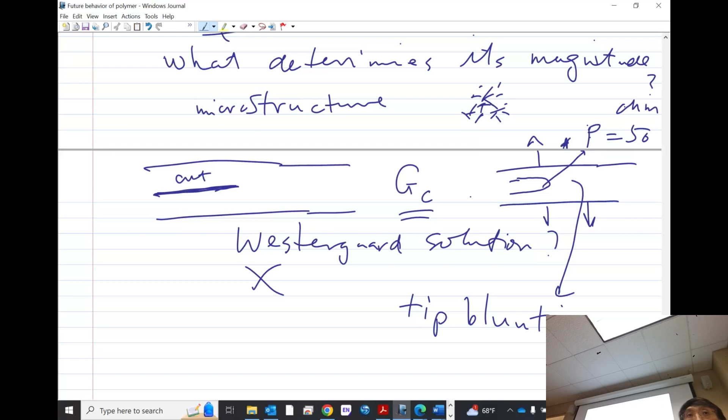In fact, for very stretchable elastomers, everyone knows that this thing not only is large, it's completely observable. We call it tip blunting. And once you have a visible tip blunting, then you know Westergaard solution of stress divergence is irrelevant. In fact, the question becomes to what degree the Inglis result can be invited back to guide us, to give us insight.

So I think today I will just end with going back to Inglis result and say a little more. And that would be a good finishing, because I don't need to diverge into other things when we come back next time. We'll deal with how we come into the field, meaning in the sense of where polymer physics comes in. So let's talk a little more about Inglis.

Can I call that tip? It's just the crack tip. And this is the so-called far field load or remote load. And the rest is something like this. There's a factor of 2. I'm not going to bother writing it down here.

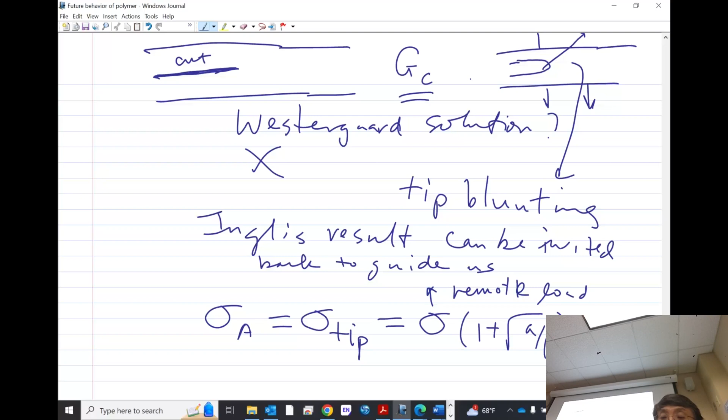Suppose we are dealing with a large crack. Remember we say when polymer, even polymer that may be flaw tolerant, which I will give you a proof of next time, you still need fracture mechanics, you still need Inglis result when you have a large crack. So by large crack, I mean A is much larger than rho. So this may as well just be written as sigma square root of A divided by rho.

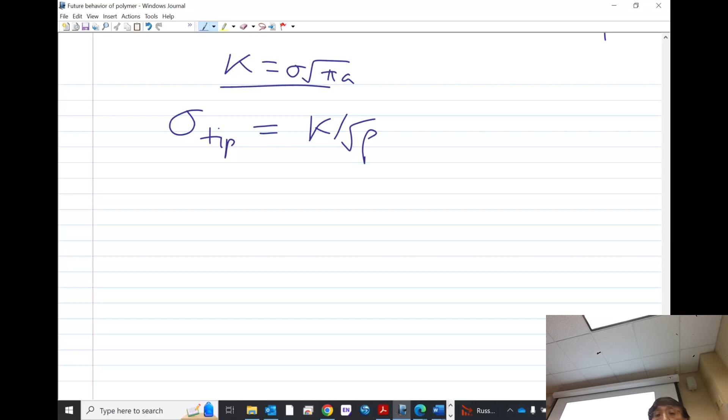Okay. The burning question about A and B will show up just now. Remember, I was struggling with being told fracture occurs when sigma goes to sigma C, K goes to KC, G goes to GC. And I said, what is that condition of C, critical condition? And watch what you do. K goes to Kc is of course equivalent to my sigma goes to sigma C because of the definition. Yeah? So far so good.

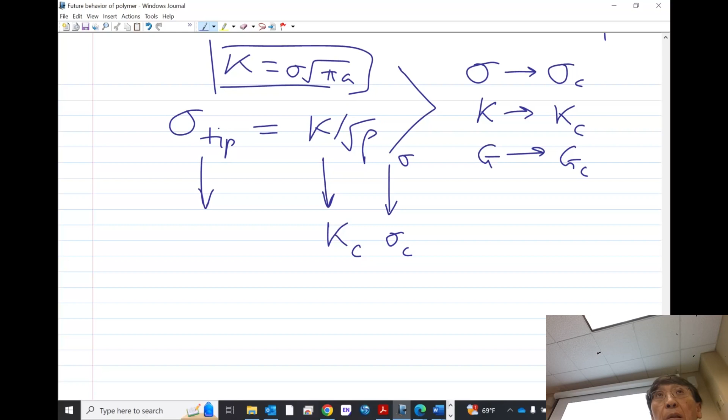On this side, on the left side, on the right side, so far so good. What happened to the right side? Right, fracture. I had that insight immediately from day one, which I had to write down in italic in the perspective article, saying, I wouldn't even call the word propose, let me use this fracture criteria. And I transferred all the credit to Griffith and Rivlin and Thomas.

Griffith has a second paper in 1924. So it's in the perspective article that I will be able to release to you guys soon. In there, they both said, man, fracture occurs probably because the stress reaches some value. Oh, Jesus. In fact, just to be precise, I kind of mumbling, because let's read together what they said in terms of, here we are. Oops.

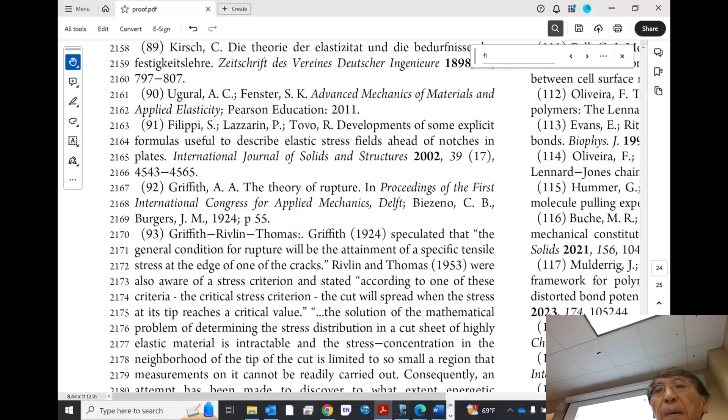So it turns out that it's still not exactly what I said, but I credit everything to them. I don't want to be burdened by any of this. I just need to be the one to emphasize this. What I'm emphasizing, that I knew from day one, is that the tip stress reaches the inherent stress. Okay? Fracture occurs when the local stress reaches inherent strength.

This statement is true whether it is flaw tolerant or intolerant, whether it's window glass or polymer. You can blame flaws. What the flaw does is build stress at the flaw tip that reaches the inherent strength of the material. I like this because I don't need to speak about one type of polymer, brittle material versus another. It's all in 1913. It's a done deal.

If you didn't realize what this little exercise was, basically I know the answer from other investigations. I traced it all of a sudden. I realized I can trace everything back to this Inglis result a century ago. You didn't realize what I did here. Let me write it down. I don't believe you realized. I answered the question of two.

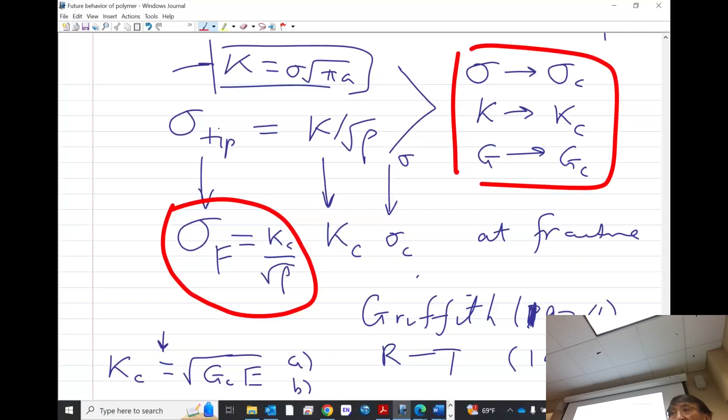And look at what you have. Isn't that what I just did for you guys, by taking you through the steps of going to the critical condition? Look at what this says. It says Kc is sigma f times the square root of rho. Let me remind you what frustrated me. Kc is also sigma c times the square root of A.

What happened? Fracture mechanics discovered you need a quantity that involves both stress and a length scale. Operational definition. That's the stress, that's the length scale. But it doesn't tell me anything. Remember we just said, but Inglis told you it tells you everything. In other words, there are two pairs of stress and length. When you have a crack, you don't have just one length scale introduced. You have two length scales introduced. Got it? You pair one length scale with one stress, and you pair another length scale with the other stress, which is inherent strength.

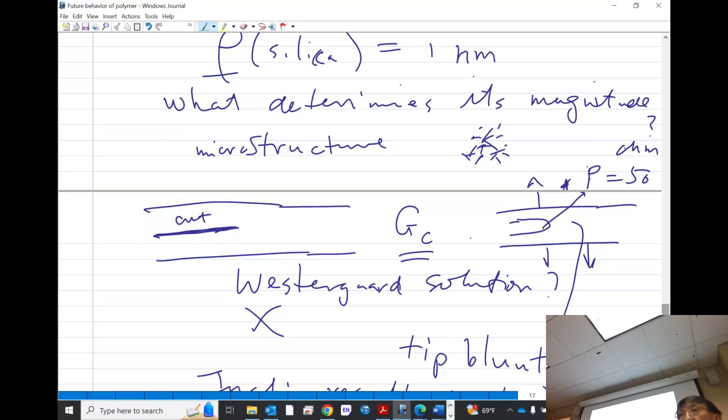Is this someone you know outside? What's so laughable then?

Next time we come back, we're going to talk about the step that led to this point, because I didn't want to keep you waiting here. The why is constant and the magnitude are both answered. Well, partially. We recognize the physics is all embedded in here, and nobody has a model to predict it based on structure. But if rho can change by many orders of magnitude between different polymers, different materials, that's an insight about how relevant this parameter is. And that's all in the Inglis solution.